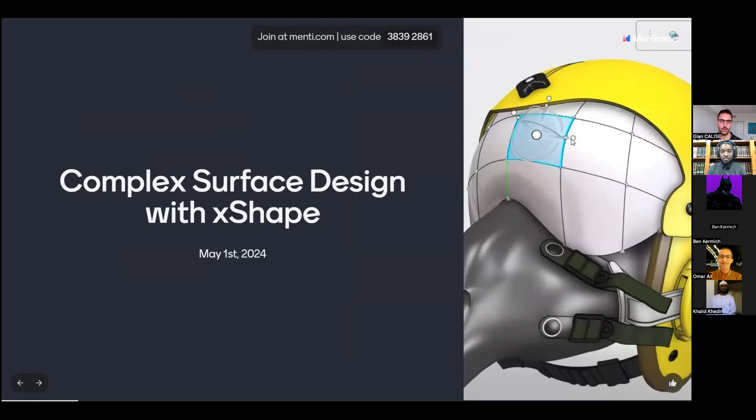So the first thing I wanted to talk about is what is xShape, and before that, how often does everyone on the call design things that include complex shapes or surfaces? Is it something you do daily, weekly, monthly, yearly, or something you rarely do, almost never? Okay, so it looks like we got a few. A lot at monthly. Wow, we got one daily surfacing user. Awesome. Great to see.

Any type of product that includes those complex shapes and surfaces would fit into this category, like a bike helmet, something in aerospace that has those crazy surfaces, or a consumer product, really anything in between. All right, so we got a couple of answers there. It looks like a good mix, but almost everyone has some familiarity with designing complex shapes and surfaces.

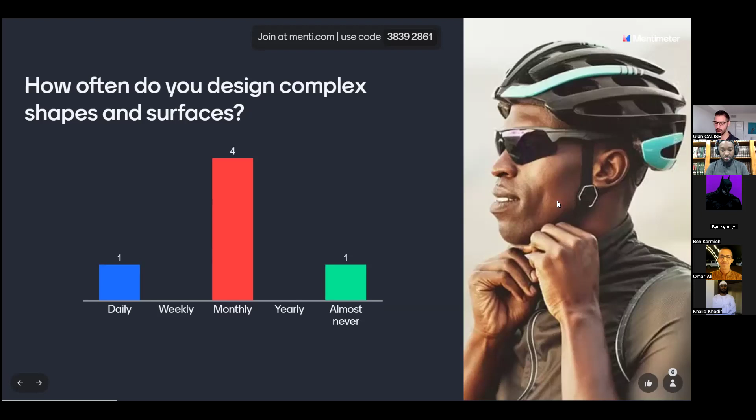So when it comes to xShape or sub-D modeling, have you heard of xShape or sub-D modeling? Do you have an idea of what it is, or not? If you have never heard of it, that's great, because we're going to start from absolute basics today. And if you haven't already joined, be sure to go to menti.com and type in this code, because we're going to play a little game in a moment.

All right, cool. It looks like about a third have heard of it before and some have not. Okay, so a lot haven't actually heard of it. That's great. So let's take a look at what actually is sub-D modeling.

And that's kind of the three things I want to touch on today with complex surface design with xShape. One is, what is sub-D modeling? And that is what we're going to start with. And then we'll talk about using xShape in SolidWorks, and then, kind of the beginning of an advanced topic, parameterizing sub-D. But first, what is sub-D modeling?

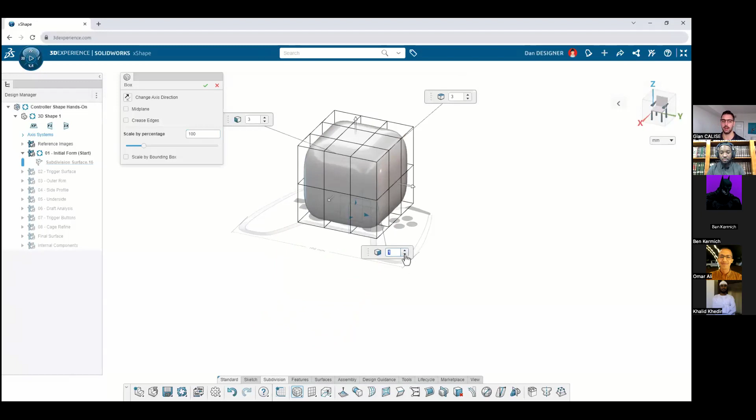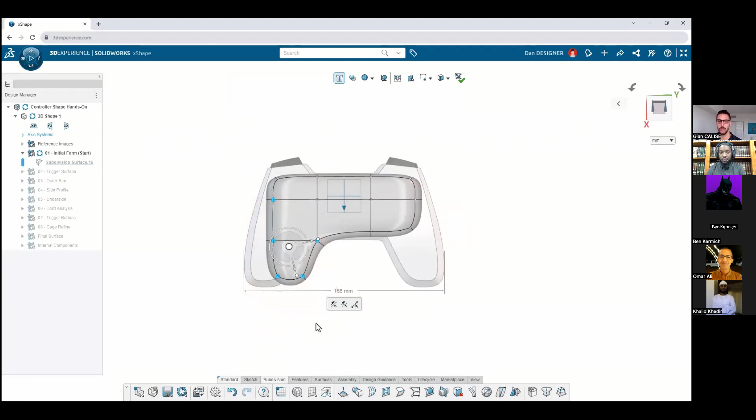Well, sub-D modeling is not the same as parametric where everything is feature based. You're kind of starting with like a digital hunk of clay that you can set parameters for, but then it's really just pushing and pulling to get the different shapes that you want. There's no feature tree, so you'll notice that we just have one subdivision surface here that we're working in. There's no new features being added, but we can just kind of sculpt this shape into the form or into the surface that we're looking for.

And there's a lot of really interesting options along the way that make this a really useful tool for mechanical engineers, industrial designers, and a lot of mechanical designers and product designers that have a need to create things that are complex in nature, at least in the exterior surfaces. So there's a whole host of different products that can take advantage of a tool like this.

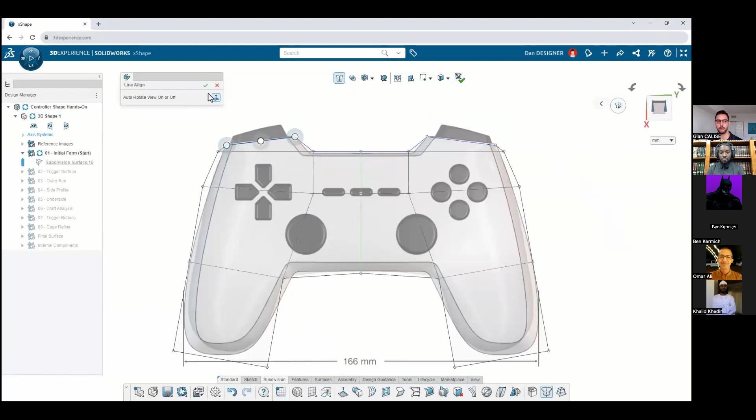But I actually want to take a step back and show the main types of products that we deal with as SolidWorks users. If we put them all in a spectrum, SolidWorks might find its way into every single one of the products that you see on screen right now. But we tend to think more in the mechanical design realm. That's where we focus. That's where our strong suit is. And of course, we have incredibly powerful surfacing tools.

But then once you get to certain areas like artistic design, this is when a lot of companies, a lot of industrial designers and product designers use mesh modeling tools, like ZBrush or Maya or Blender. Those would be mesh-based tools where you're creating a mesh, and it's a lot easier to be artistic because everything is not inherently constrained with parameters the way that mechanical design is. But industrial design is somewhere in the middle where there is an artistic portion of it, but then there also is some mechanical design required too. And that's really where xShape tends to shine.

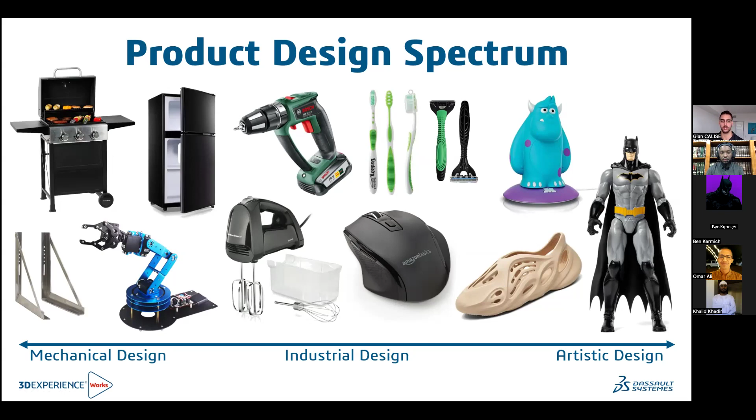So xShape is our actual sub-D modeling tool that is fully on the cloud, fully in a browser, but it works really well with SolidWorks, and we'll show that in a moment. But the difference is what comes out of this. So I mentioned how on the right side of the spectrum here, you would typically use a mesh modeler. On the left side, we need to end up with what are called NURBS surfaces. So there's two different types of formats. There's NURBS, which are non-uniform rational B-splines, and this is what SolidWorks surfacing creates.

So SolidWorks surfacing is creating these surfaces that are driven by math and geometric constraints and relations, but still give you that smooth result. And the native CAD systems, like Parasolid, we've got SolidWorks, NX, Solid Edge. CATIA uses CGM. There are different underlying technologies that produce those NURBS surfaces.

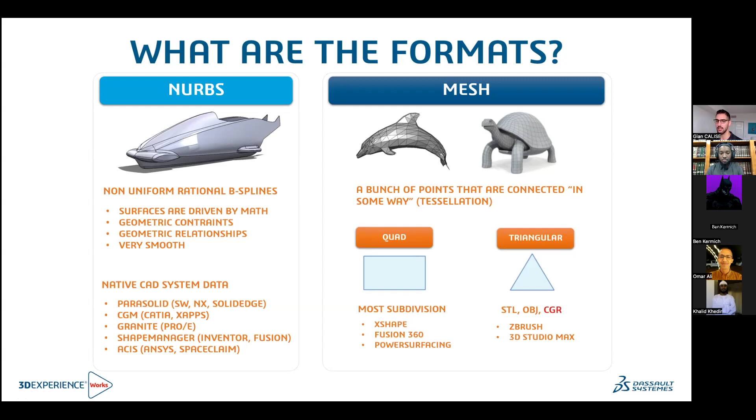Whereas mesh, like we see on the right here, there's a few different types of meshes, and a lot of different tools out there for making mesh models, like I mentioned before, for the more artistic side of design. And these are what are called tessellated. So they're not always inherently smooth surfaces. And if you've tried to use mesh data in SolidWorks, then you probably know that it doesn't always come through perfectly the way you want it to. And sometimes you need to do some post-processing steps to get it the way you want it to look.

So subdivision is kind of in the middle, where you're starting with a mesh. Like you see, we have this kind of cage or mesh of vertices and lines connecting them, but then we also have the surface in the middle. So we are actually using a control mesh. That's what we're using to create the shape. The resulting surface has no concept of the shape. You can make a circle or a cylinder in sub-D, but it doesn't actually know it's a circle or a cylinder. And as soon as you were to push or pull one vertex, then it's no longer a perfect cylinder anyway. But you get this extra flexibility.

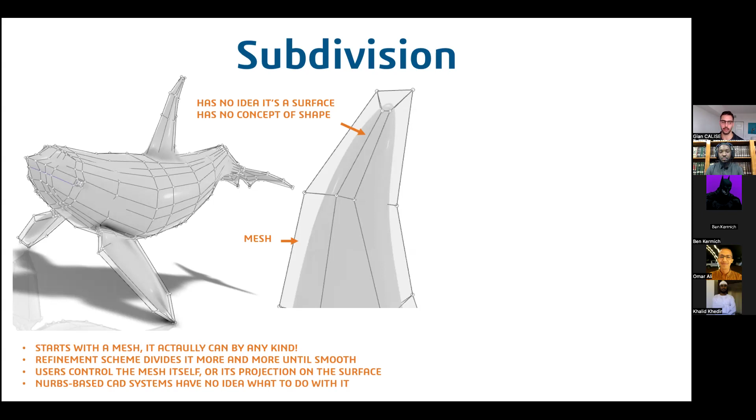So in order for what we make in a subdivision tool to be used in a normal parametric assembly, like if you wanted to make this orca in xShape and then bring it into SolidWorks, we still need a NURBS surface. And one of the really powerful things about xShape is it allows you to model freely in this subdivision environment, but then as soon as you're finished, it converts it to a NURBS surface automatically so that you can cut a hole through it. You can use other traditional surfacing tools. You can do whatever you need.

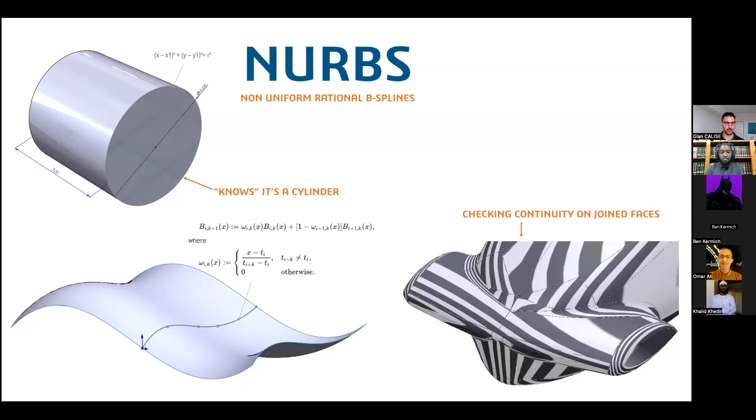So the NURBS, the non-uniform rational B-splines, that's where everything is driven by math. And we kind of get the best of both worlds with xShape because you can model things in sub D and take advantage of the speed and the freedom that it gives you, but still end up with usable surfaces in SolidWorks.

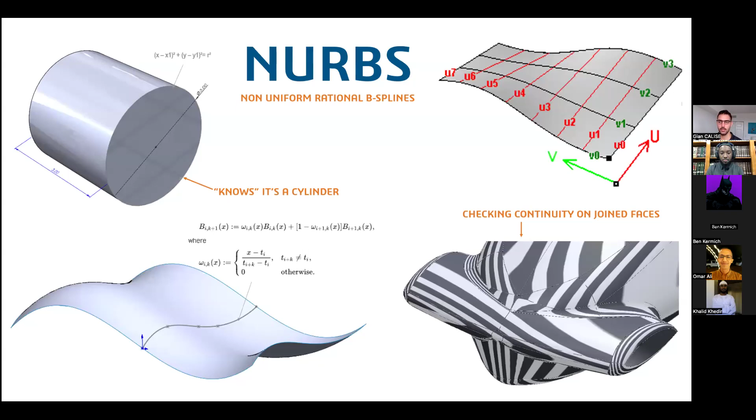And the key benefits are shape creation without any overhead. You don't have to create sketches. You don't have to have a plan in mind. You can start right in 3D. There's less of a hack and slash method to make changes because when you're making changes, you're just pushing and pulling either the vertices or the faces or the edges on the sub D surface. You're editing a single shape. You're not actually editing a whole list of features or series of features.

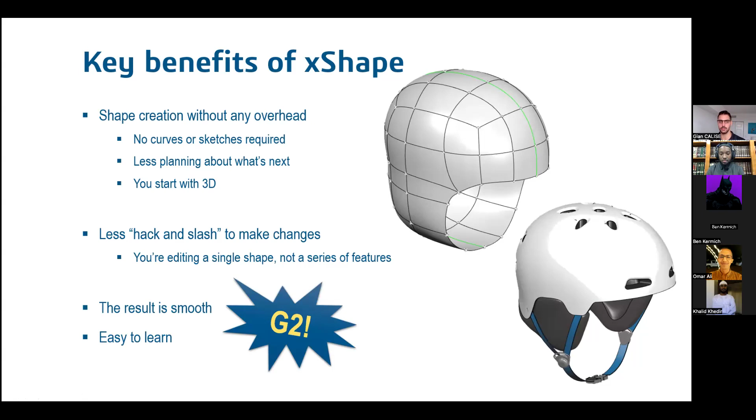The results are always smooth and it's G2 continuity. So the highest level that most industrial designers or artistic designers are looking for in their surface design. And it's just easy to learn. It's really not an incredibly difficult tool. There's not a ton of features because you don't really need them. You have a select set of features that can kind of allow you to make almost anything.

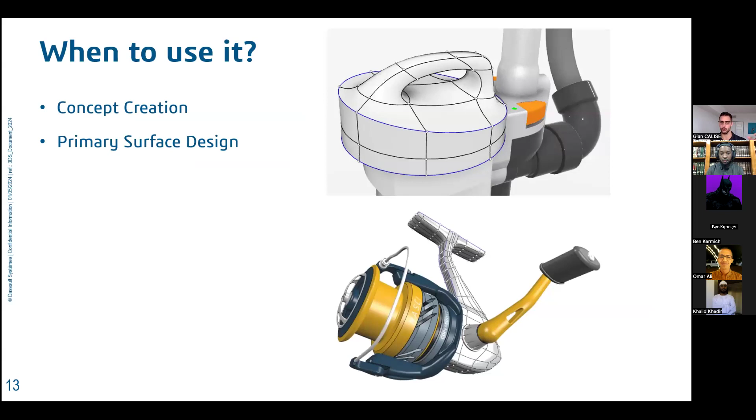And when to use it, the best time to use it is concept creation when you're doing that primary surface design before you do, you know, all the features downstream. And then, of course, whenever there are reduced constraints. So there are always going to be parts of your design that they have to constrain in some way. They have to be a certain dimension wide, or they have to interface with another component in this specific way that is constraining on the design. But when that's not the case, that's where xShape is very, very powerful.

Okay, I just saw in the chat that there's no sound. Are you guys still hearing me? Oh, yeah. We can hear you. Okay. Probably internet connection problem. Yep. Okay. Awesome. All right. Just wanted to make sure. Thank you.

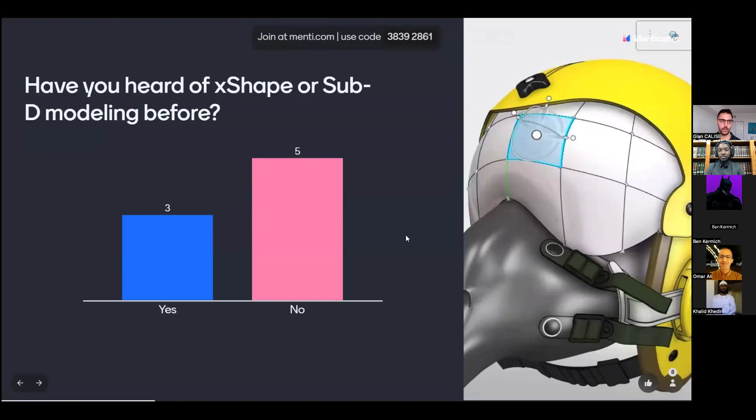We're gonna play a little game called Sub D or Surfacing. So the rules of the game is that I'm going to show you a model and I've homogenized all the images of the model. So it's not like a screenshot from within SolidWorks. I've rendered them all out in the same system. So you just see a product and you're going to choose, do you think that this was made with a sub D modeling tool or was it made with traditional surfacing? And I didn't make every single one of these, but I have made almost every single one. All right, let's get started.

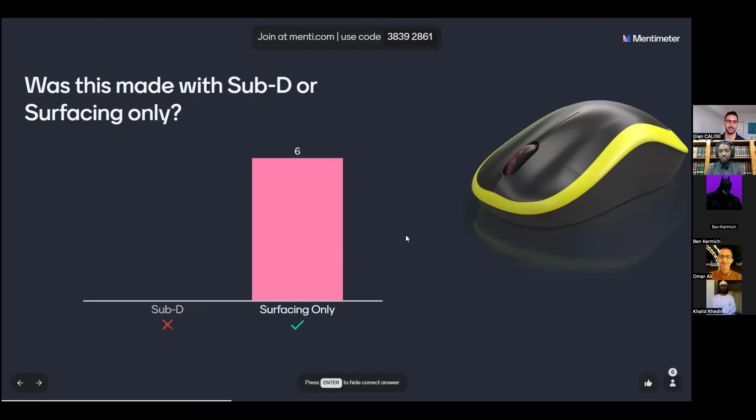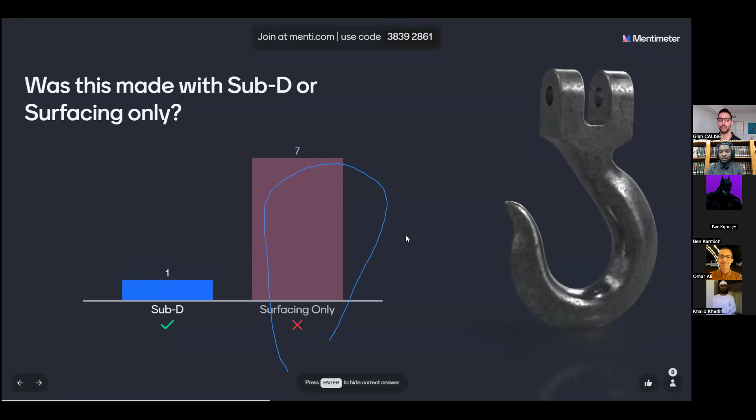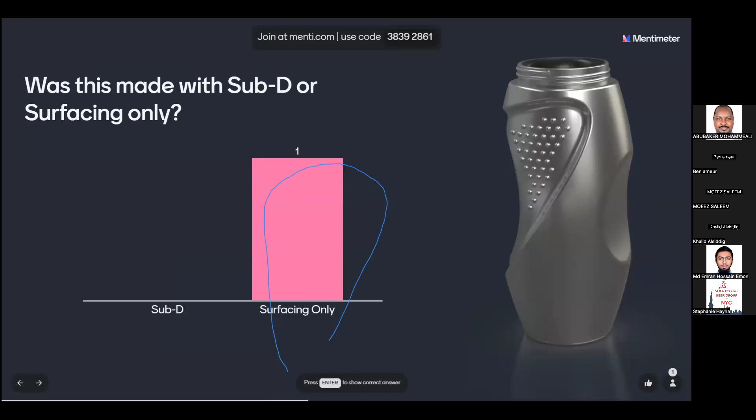Okay, awesome. Well, our single voter for sub D was actually the one who got it right. This one was made in sub D. So just to show you that not everything you see that looks very parametric in nature is actually only done with surfacing. There's a lot of ways that you can accomplish shapes like this with xShape or with the subdivision tool. All right, what's next? This water bottle. What do we think? Is this one sub D or is this surfacing?

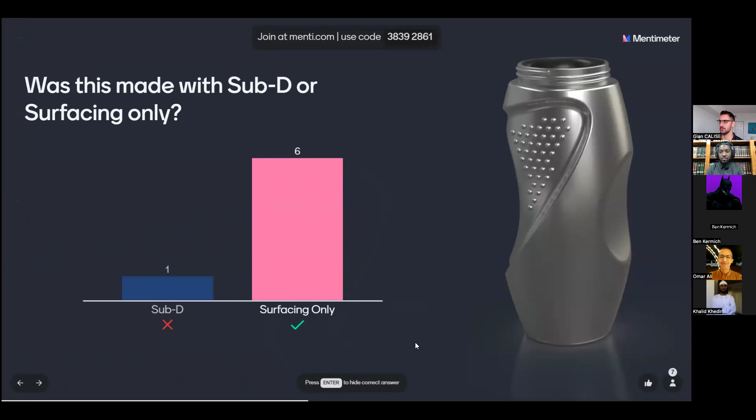Surfacing. All right, cool. Everybody thinks this is surfacing. Yep, you got that one right. This one was surfacing. This is actually from a SolidWorks surfacing tutorial on YouTube. If you haven't seen this one, it's a pretty nice one. All right. Let's go to the next one.

This kayak. Is this sub D or is this surfacing? Sub D instantly got 3 votes. Wow. Yeah, you sub D voters, you got it right this time. This one is definitely sub D. Although you could have, maybe not just as easily, but you 100% could model this using traditional surfacing tools. And that's probably how most kayaks are modeled. They're probably not modeled, for the final version, using sub D.

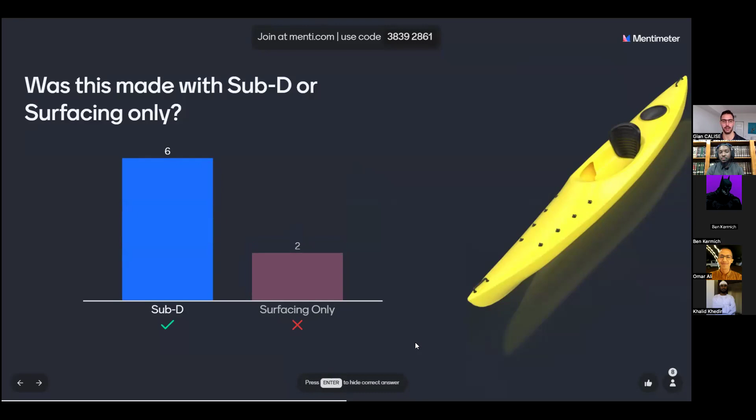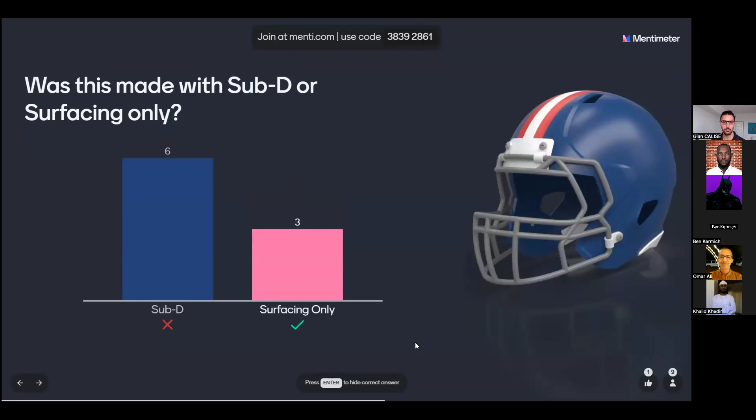But all right, this football helmet, sub D or surfacing. What do we think that this one is? Sub D. Wow, a lot for sub D on this one. Tough because this one is actually only surfacing. So this was surfacing only. But you definitely, once again, could model this in sub D. All right,

motorcycle helmet. What do we think this is? Sub D or surfacing? All right, instantly we got a bunch of votes for sub D, and you guys are all right on the money. This one is 100% sub D. Or at least I shouldn't say 100% sub D, because the base of this was made in sub D, and the base of pretty much everything you see here is made in sub D. But then we did use a couple surfacing features to clean it up and to get it looking the way it looks here.

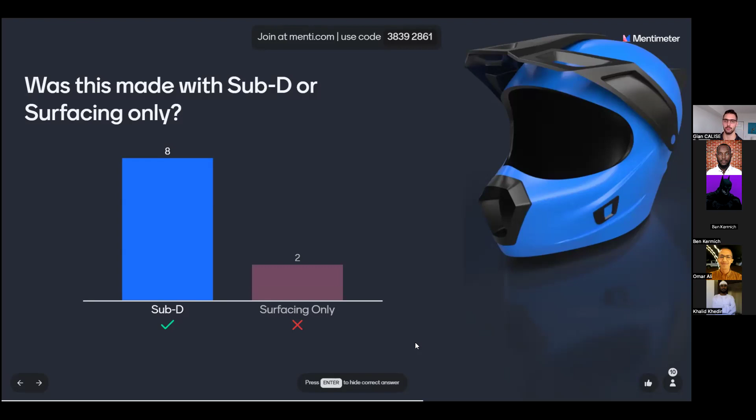And that's just to paint the picture that you're never going to only use one. Sub D is really just another tool to add to your arsenal. It's another tool to add to your toolbox of things that you can use to create quick concepts, create the base surface, and then add whatever features downstream, surfacing or not, to get it ready for manufacturing.

What about this one? This is another really artistic one. And immediately it seems like everyone assumes that this is sub D. But you might be surprised to know Jordan Tadich, if you know Jordan, he actually modeled this, sorry, not in sub D, with SolidWorks surfacing. And he actually told me this took him roughly about 40 to 50 hours or so to model this thing using traditional surfacing tools.

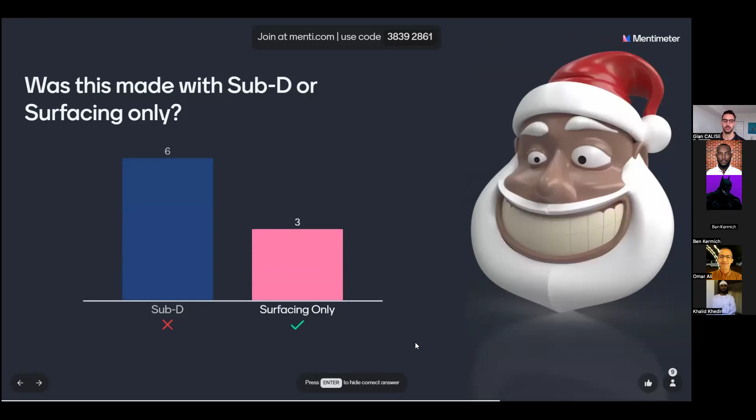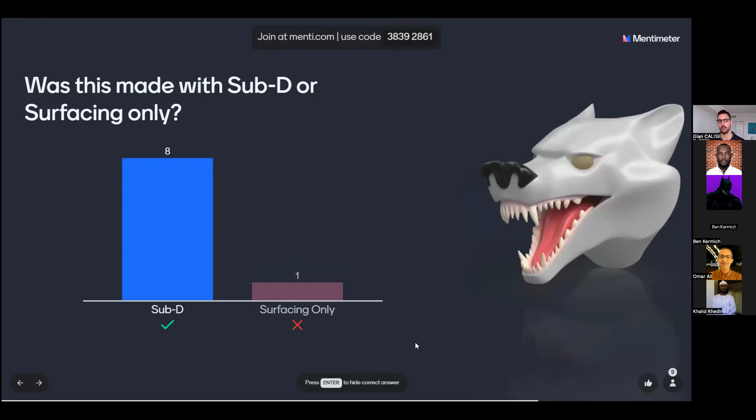My last question, though, for you all, this is still part of the game. I'm curious. You know that this wolf head was done in sub D, but how long do you think it took for me to model this in sub D? So you can use this slider to choose, is it 1 hour? Is it 50 hours? Somewhere in between. How long do you think that this actually took to model? And keep in mind, Jordan's little Santa head took about 40 to 50 hours to do using traditional surfacing tools.

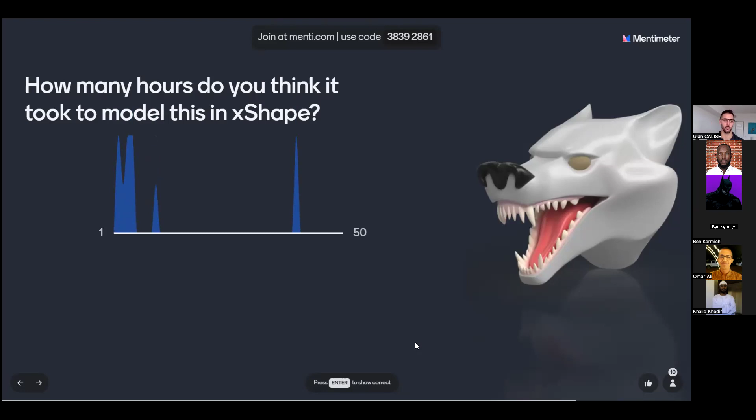All right, and it seems most of you think that I am like a sub D genius and just modeled this in 1 hour. It did take 3 hours. So it looks like a couple of you were right there or very close to it. And I have proof because this was all done in one modeling session that I recorded on my laptop. A lot of the time lately, I've been recording everything I do in sub D, because I love watching the time lapses after the fact to see how I actually figured out how to model this thing, because it quite literally is just like pushing and pulling a blob of clay.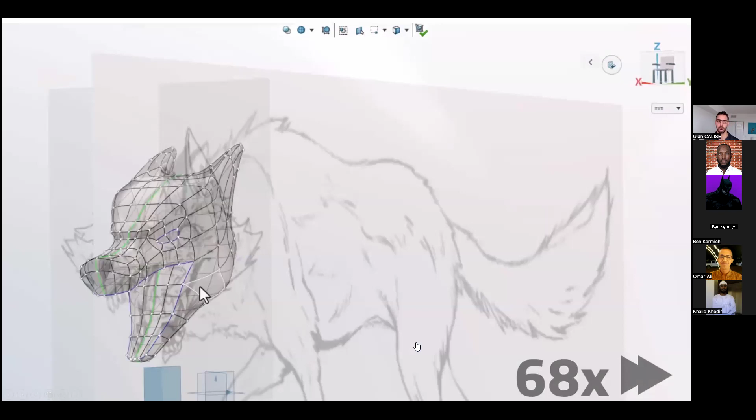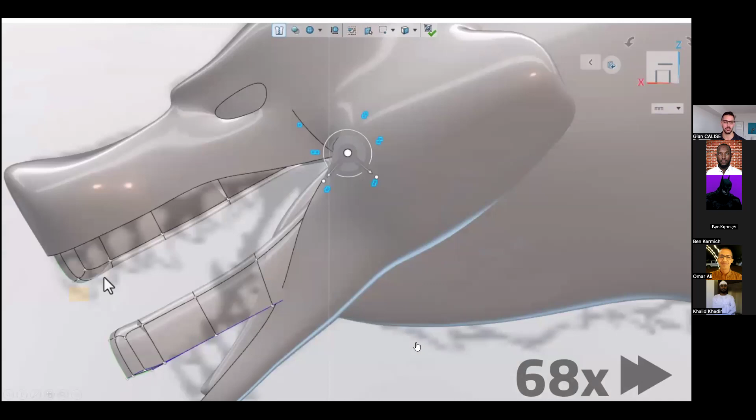Like you add material, you take material away, you want to add more or less detail, you subdivide or insert more loops. Making this tongue was really interesting. And then making the gums here. This is a really weird way to make the gums, but they're all just separate sub D bodies. And then making each individual tooth, they were each their own sub D body here.

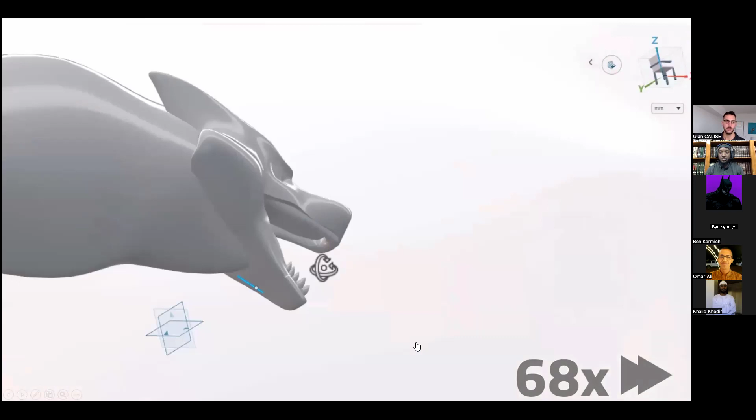Luckily, we have like a copy and paste sub D. So I could just copy the tooth and push it over, change it a little bit, make it a little bit bigger or smaller. Yeah, this nose was pretty interesting. And this is super fast. This is 68 times the normal speed. But yeah, this is a lot of fun, actually.

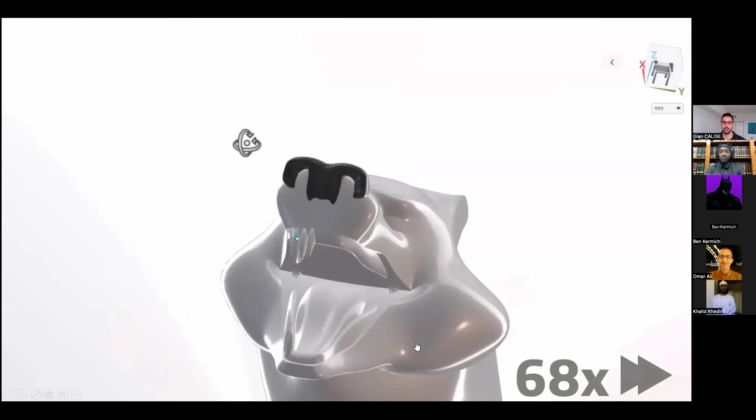I'm sure that you guys get into this state of flow when you model in SolidWorks, when basically you're having more fun than you are actually putting work into modeling. And so it doesn't even feel like you're really working. That's kind of how it is for me with xShape. I love this kind of digital sculpting that we can do here.

So I think that just wraps up the wolf head itself. We did add a lot more detail after the fact, but you can see how quickly we were able to get to a shape that was usable. And just for your reference, I don't just model wolf heads for no reason. This was for a Magic Wheelchair project; one of our kiddos over in the Detroit area was a big fan of wolves. So I was the modeler for one of the teams working on one of these Magic Wheelchair projects.

If you haven't heard of Magic Wheelchair, it's this amazing foundation where they find kiddos with wheelchairs that have a particular interest in having a really cool wheelchair that they get to choose what it is. So I got to play a small role in this really cool one where this kid loved wolves. So we got the heads 3D printed and we had a lot of help getting this whole thing together, but this was a lot of fun.

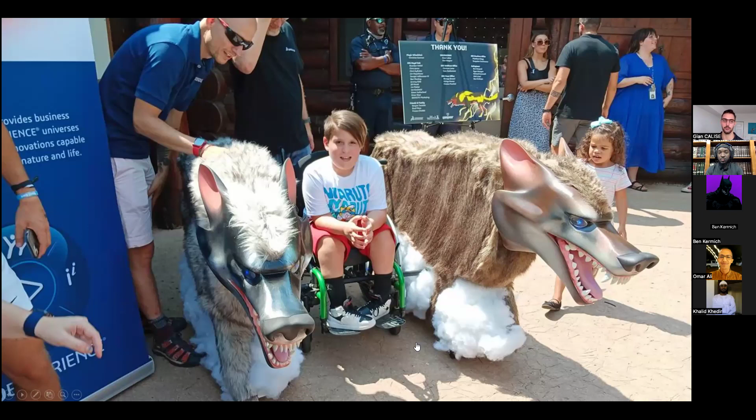All right, so that was what is sub D modeling at a high level. I want to show what's most relevant to you all, which is using xShape and SolidWorks together. So what does that actually look like? How would you, as a SolidWorks user, be able to take advantage of a tool like this? Well, there's two primary methods. There's using it in assemblies, and then there's when you actually have an xShape surface that you want to add features to in SolidWorks, when you want to use xShape geometry in SolidWorks parts.

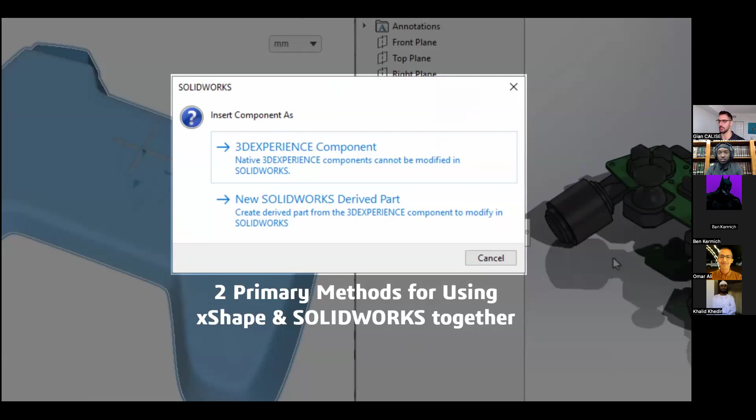So let's say I have an xShape component, I want to drag and drop it into SolidWorks. I instantly am prompted with a choice. Do you want to make this a 3D Experience component that'll just be added, and it would turn your SolidWorks assembly into a multi-CAD assembly where you have SolidWorks parts and 3D Experience components. The other method is create a new SolidWorks derived part, which automates the process of creating a new SolidWorks part and then doing an insert part feature of the 3D Experience component so you can keep adding features downstream. So we'll take a look at both of those methods.

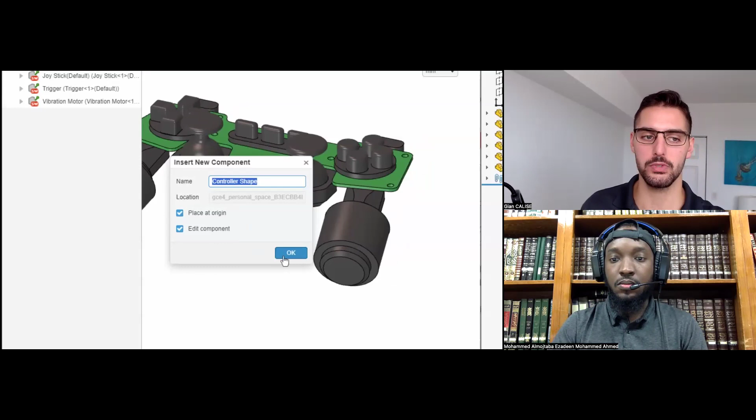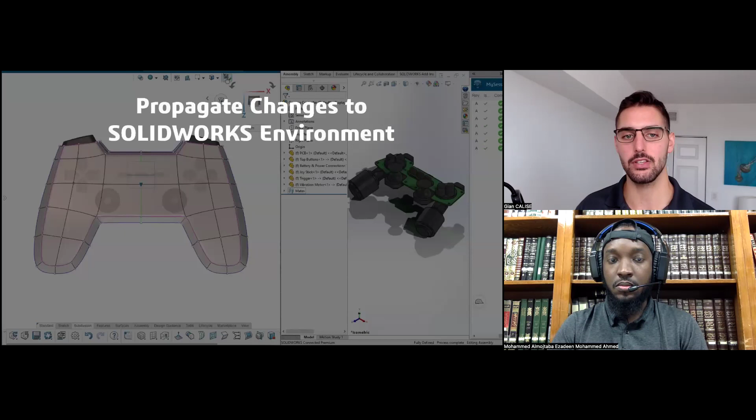I love modeling right in context of the assembly. So one of the things that you can do in the X apps and in xShape, we can insert components right into the SolidWorks assembly so that we can actually sculpt in the context of our assembly itself. So just like you saw before, we can sculpt this gaming controller into shape. I'm going to fast forward through most of the steps here. We can apply symmetry, we can crease, and we can save and then propagate these changes back to the SolidWorks environment. So we'll save,

and then we're just going to simply reload the assembly from the server. And this works because all of our SolidWorks assembly and parts here are stored in the 3D Experience platform. If you're not familiar with this task pane on the right, this is the task pane you get when you save everything to the 3D Experience platform. And then this right click and reload from server allows you to look back up to the cloud and pull down the latest version. And then we get loaded up with the new assembly that includes this controller shape 3D Experience component.

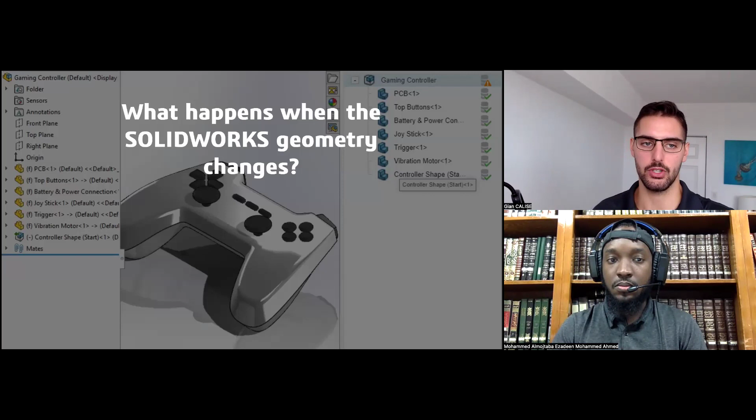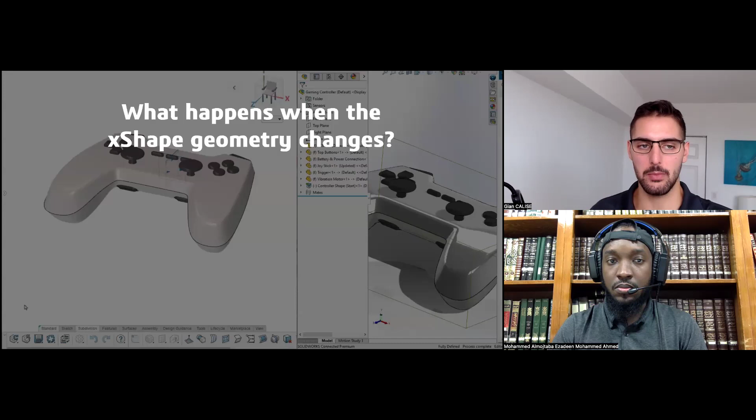But what happens when the SolidWorks geometry changes? So for the example of this gaming controller, maybe our joysticks end up being a little bit bigger at the base there. Once again, all we had to do was reload in xShape, and we can see those changes propagate immediately. But what happens when the xShape geometry changes? Well, it's a very similar method. In this case, we're just going to pull this face forward a little bit so we don't have to compromise our shape. And then once again, in SolidWorks, we're just going to save and reload from server.

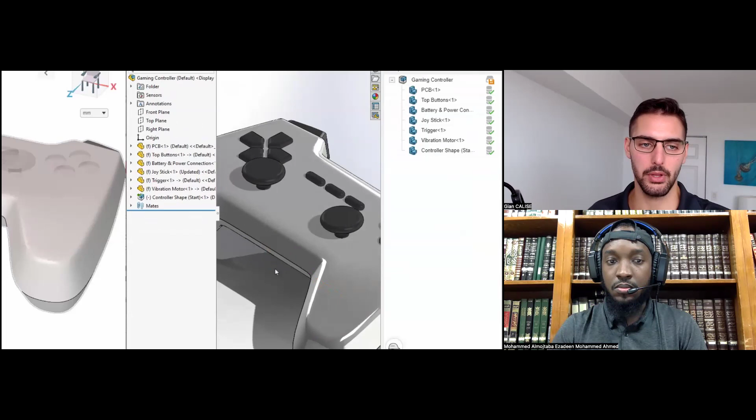And now we can see we no longer have that bleed through. And if you tried to do this with SolidWorks surfacing, it might not have been the most painful change you could have had to make, but this one is definitely going to be faster using the sub-D method when you're still concepting, versus if everything was defined with splines, sketches and surfacing features. It's just easier to make changes.

So this is where I'm going to switch over to the second method. So far you saw the multi-CAD approach. You can have the xShape component, which is a 3D experience component, live inside of a SolidWorks assembly. You can mate to it. You can add whatever features in xShape and XDesign to prepare that for manufacturing. Like you can shell it, you can cut the holes through it in XDesign and xShape.

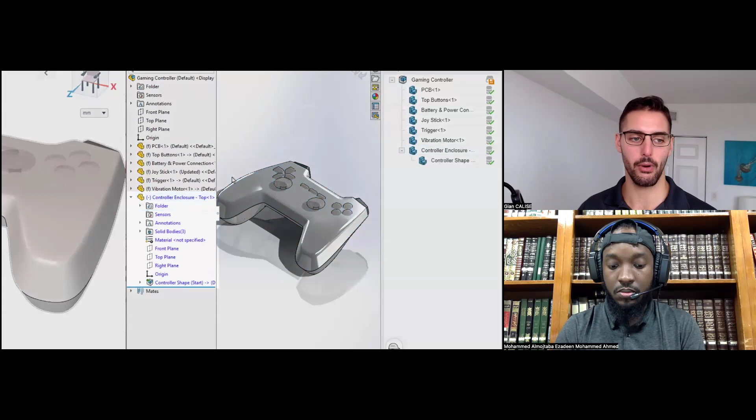Or if you would rather add those features in SolidWorks, what you can do is create a derived part from the xShape component. And all this does is automate the process of creating the part and then inserting the 3D experience component inside, maintaining that reference to the xShape part. So it's very similar to an insert part. You know how you can insert a part within a part.

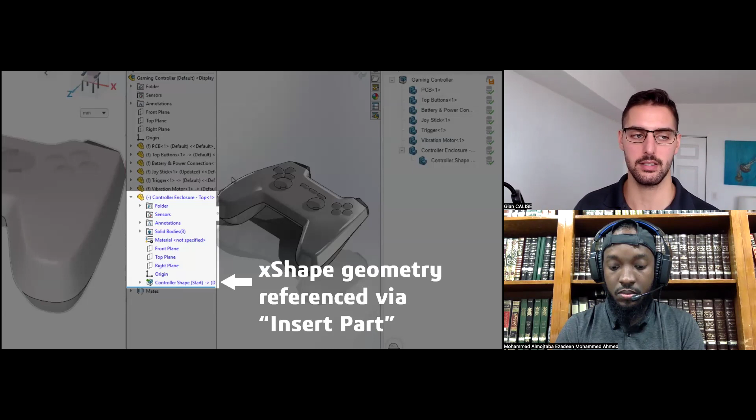That's very common for industrial designers: if you have a base part, like an overarching shape for the product, and you want to split it out into sections, this is a very common way to do it. And in this case, our insert part is just a 3D experience component. So in SolidWorks, we can add features like shell, or the indent feature. I love the indent feature. So powerful, especially when modeling in the context of an assembly. We can add those kinds of features.

And then what happens when the xShape geometry changes? How do we actually propagate those changes back down? Well, we can still just save and reload from server. The process is the exact same, whether you're using it as a multi-CAD assembly or in this derived part method. So that was a lot going on right there. If you have questions, feel free to throw them in the chat or just unmute and ask. But this is the basics of how you would use SolidWorks with xShape, using those two tools together.

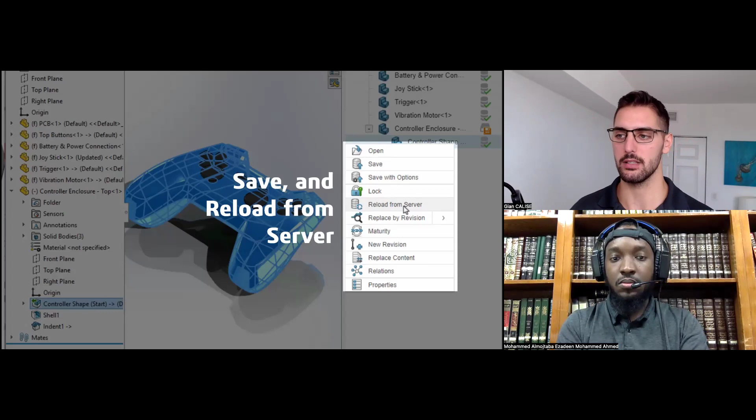And remember, xShape is fully in the browser, in the web interface. I usually will have xShape on one screen and SolidWorks on the other when I need to design with both tools. But that's the extent of using the xShape geometry in SolidWorks assemblies, as well as using that xShape geometry within an actual SolidWorks part.

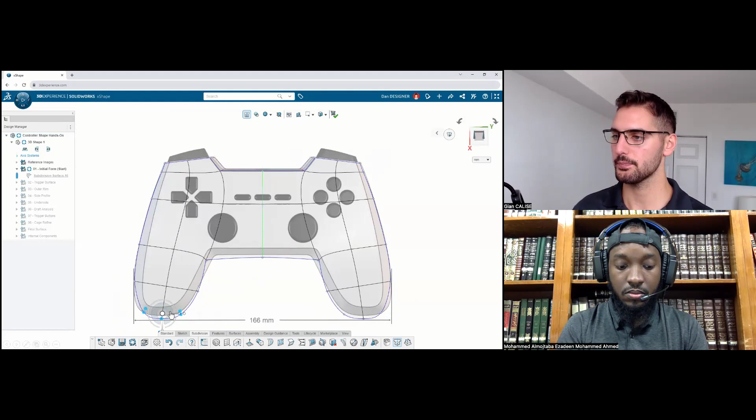So just jumping back to where we just were. All right, so that just about covers this. But the reason you would use the SolidWorks derived part method is because you want to use SolidWorks features. So if you can get what you need done using xShape and xDesign for those components, great. If you need SolidWorks for some of the advanced features we have, like whenever I need to do anything injection molding related, I don't know if I could live without the lip and groove feature, the mounting bosses. We have some really powerful ribbing in SolidWorks and a bunch of other tools that are

great for injection molding. That's when I would say, okay, take your xShape surface as far as you possibly can until you're happy with it. And then let's bring it into a SolidWorks part and add whatever features we need downstream. And that is the basics of using xShape and SolidWorks together.

So let's jump into, unless there are any other questions, feel free to throw them in the chat or unmute and ask. But the last thing I wanted to cover today was... Yes, great question. So yes, sub D is like working with clay. It's like working with a hunk of digital clay.

There are inherently fewer constraints, fewer parameters, but the last section I wanted to show you today is called parameterizing sub D. And I wanted to share that because it's one of the first things I always get asked by SolidWorks users: okay, if I make this surface in xShape, how do I make sure that it is the correct dimension? How do I make sure it's accurate and lines up with what I need it to in the assembly?

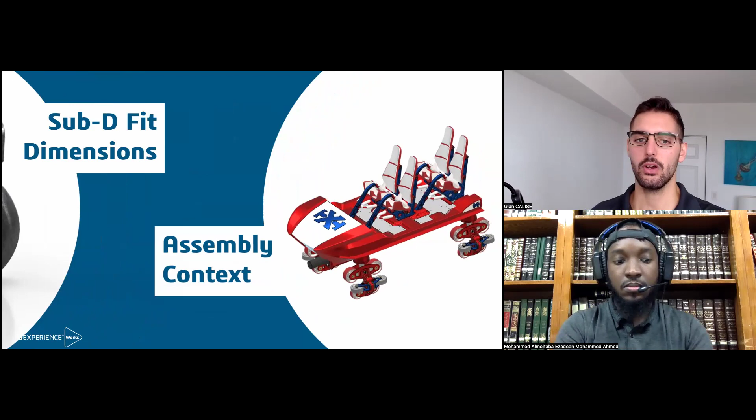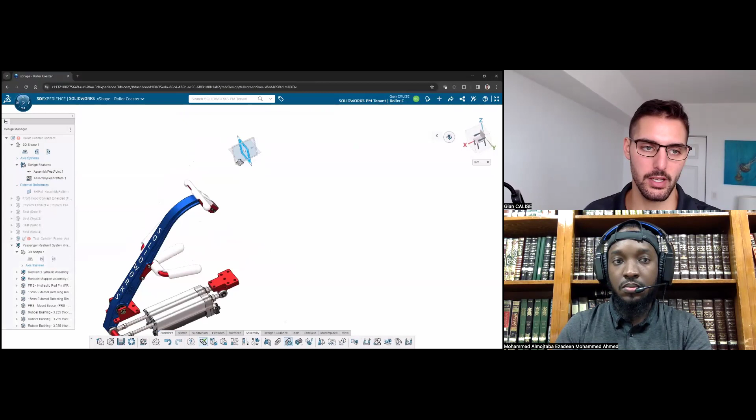So I have two models to look at here. We've got the hook, which we now know is made using xShape. And then we also have this cool roller coaster part where I think it's the lap bar that we're going to take a look at. But let's start with the lap bar, or the restraint system, I guess, for this roller coaster. So this is just one context of an assembly where we had to fit parameters of other components. In this one, I'm going to fast forward through most of this, except for the parts that are really specific to this one topic.

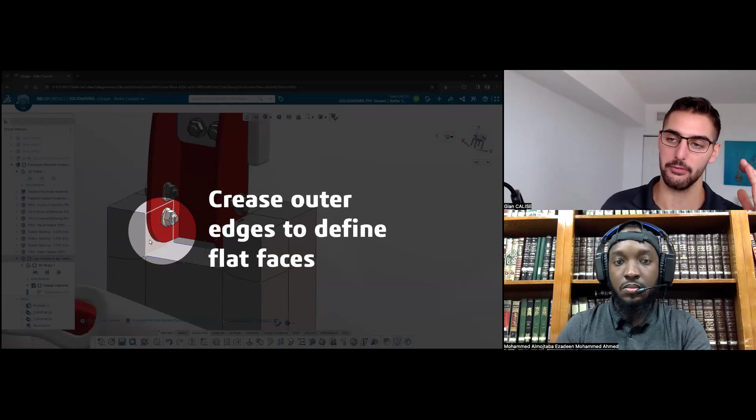So we start with this blob of clay. We're pushing and pulling, adding symmetry, inserting loops. We can extrude faces and add creases. And one of the things that we can do is crease outer edges to define a flat face. So you'll notice that in sub D, we have all these different faces. And as long as there are creases all around one of them, you can actually make it fully flat. And xShape, xDesign, SolidWorks, they'll all recognize it as a flat planar face. And then we can do things like align it to other flat faces.

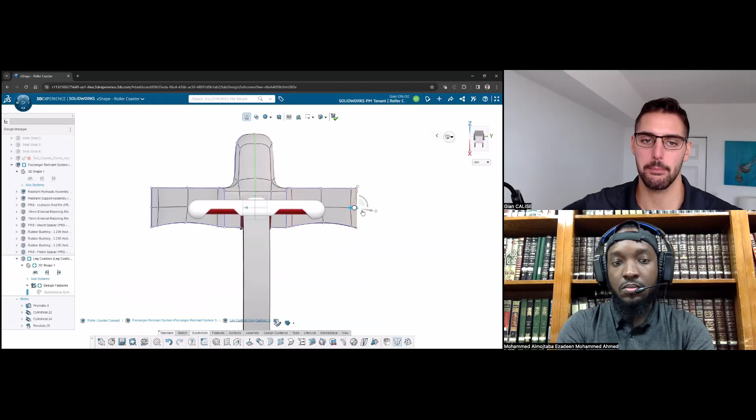So we can take that flat face we just defined in our xShape surface, and we can align it to geometry so that we can make sure that this actually fits where it needs to. So we can keep using those alignment tools to get this to the right dimensions that we need it to be. Another thing that we can do is align edges to be collinear. So we can align all of these sub D entities to each other or to other model items. And then once again, we can just sculpt whatever we need to sculpt. We can make whatever shape we're looking for, mostly just by pushing and pulling with this little robot manipulator.

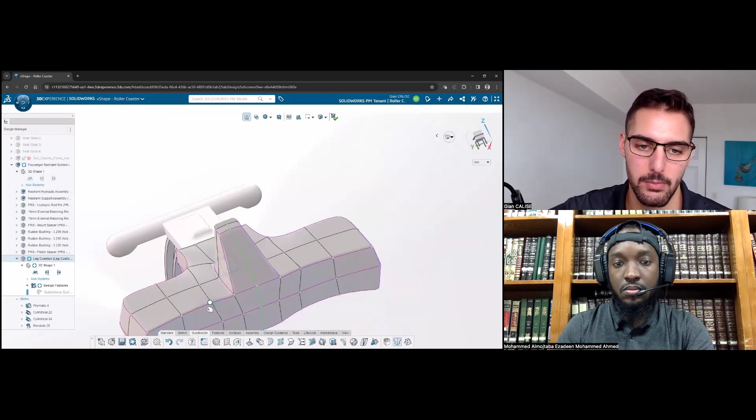This little triad that we call the robot. You'll notice I have creases going all over this model, those pink edges that kind of break up the continuity of our surface, which is just a real time save. It wouldn't be as useful of a tool if you could only create super swoopy shapes. Sometimes you need hard edges in there.

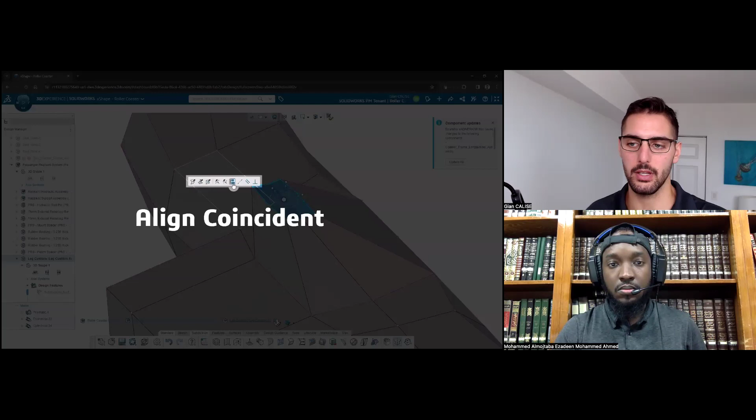Flattening faces. So we got a bunch of facets that are all kind of doing their own thing here, but we want to make sure that they're actually flat. So we can grab all four of those and align them coincident. Aligning them coincident actually makes them flat relative to each other. And then we can just continue modeling here.

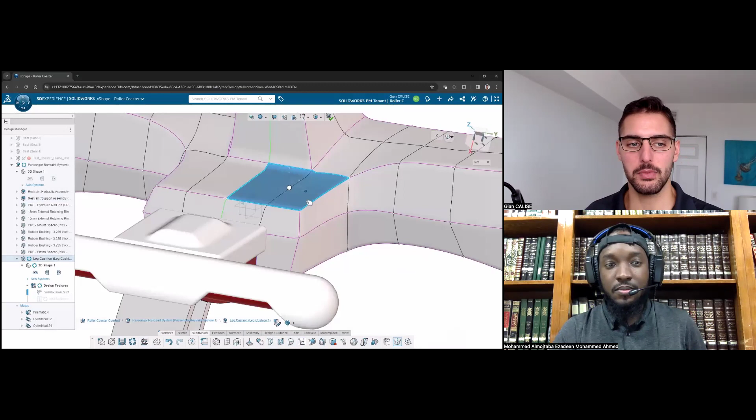I hope that this isn't too fast for you guys. I know I kind of keep it fast because I don't want to show things twice, but I also love the time-lapse approach to showing xShape because I could model something live for you right now, and we could get maybe 10% as far as we see right here, but we won't be able to see the entire thing.

So another thing that we can do that becomes so powerful is being able to translate along a direction that is in the model itself. So we can set our robot to go along that edge in the model and then make translations or manipulations to the model that are in line with that direction.

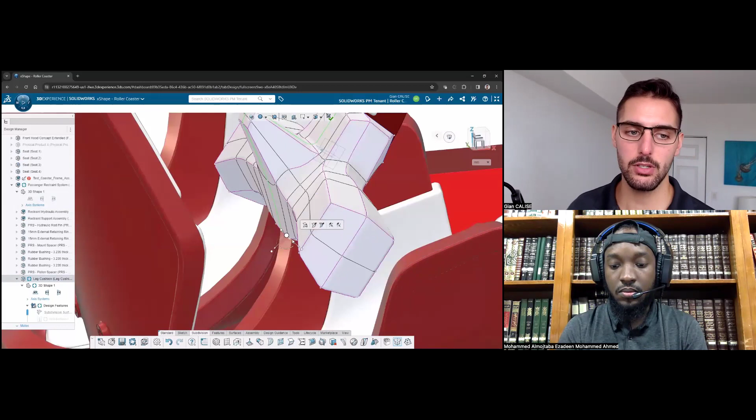You see, I've done a ton of working and reworking. It's very conducive to the creative process, where you're figuring out what shape you might want to use. And it's gotten to the point where I barely sketch anymore. I don't really do much 2D sketching when I want to make something. You can just jump right into 3D and figure out what the shape is that you're looking for.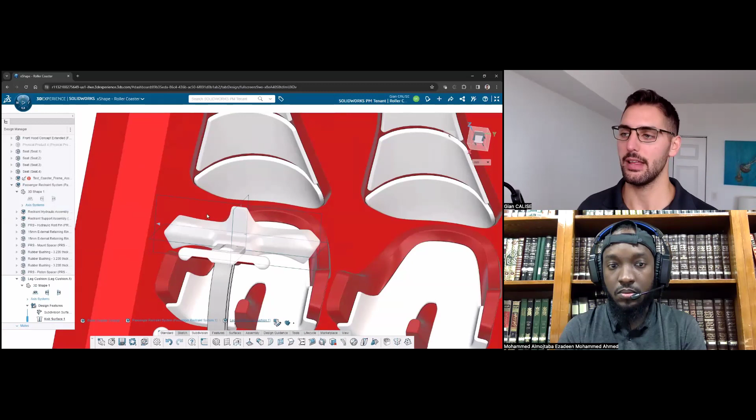And you might have seen that I was jumping back and forth within that cage view where you see the mesh. That's another really useful tool in there. But that's how we can take advantage of designing in the context of an assembly where there's a bunch of constraints. We needed to make sure that the lap band had certain faces that would align to the edges of our restraint system, that would align to those outside walls.

We also needed to make sure that certain edges or certain movements that we made were only along a certain direction, and we can set that direction based on the other parameters in our model. And then we also saw a bunch of alignment tools that you can use to flatten faces and make them work for what you're designing.

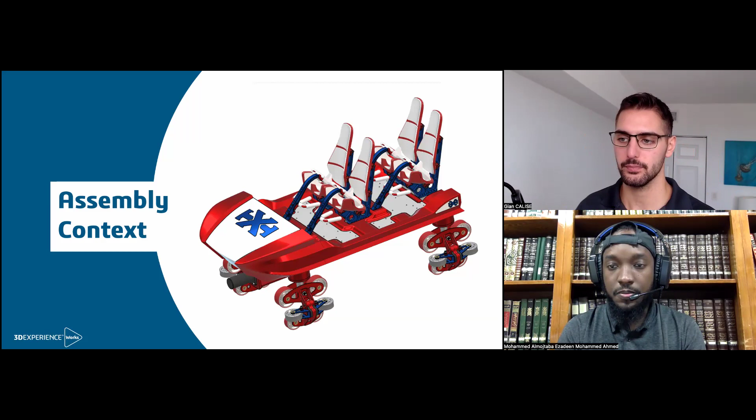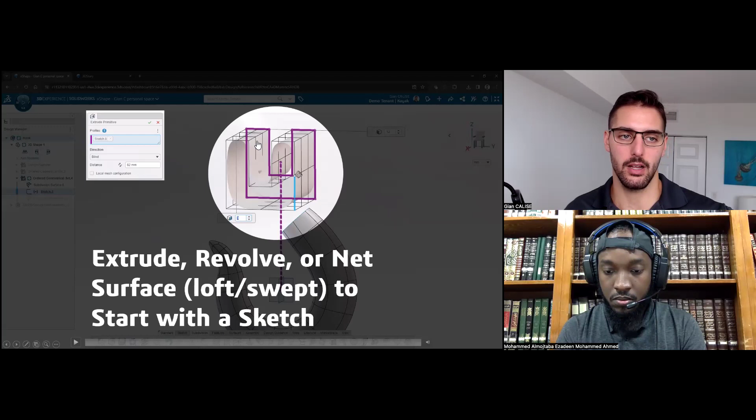So one of the tools that we can use is the extrude, revolve, or net surface. You can use a sketch to actually define the SubD surface itself. But keep in mind that it's the cage that we're working on. The cage itself is what we see going around this grid of faces and edges, but the surface within is what we actually end up with.

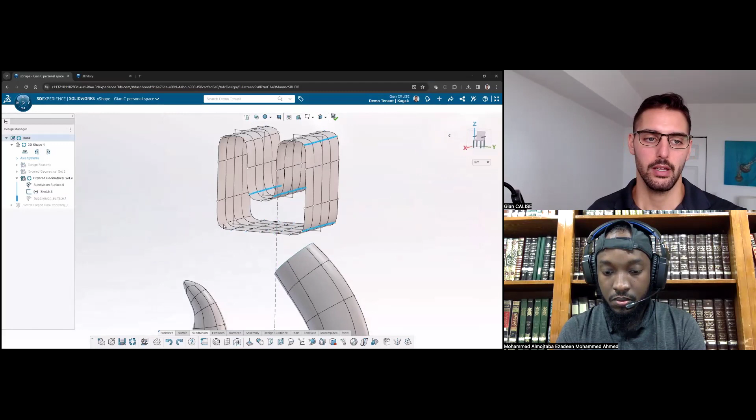And we can revolve, we can extrude, or we can loft and sweep to get our starting surface. And we can edit the number of edges going along this thing till we get the right number of vertices or faces that we're looking for. And then the first thing I do is crease so that we can end up with flat faces everywhere. And then we can make precise movements.

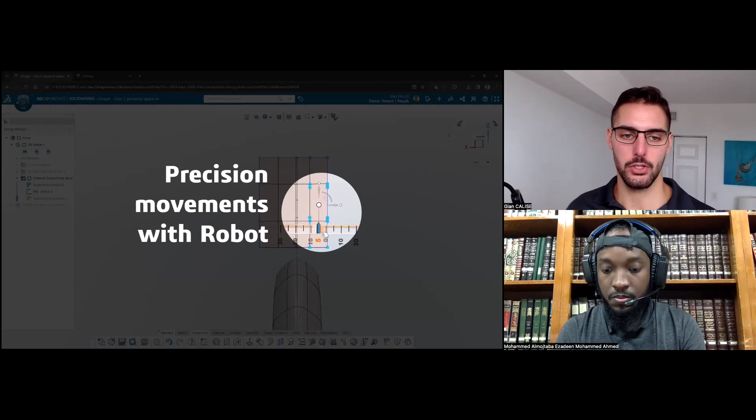So you might not have realized this, but this robot manipulator, we can move it by exactly 5 millimeters, or you can type in an exact value. Now, the thing to be aware of is, unless it's a flat face, it might not matter. But if you need to have two flat faces that are parallel to each other that are, say, 20 millimeters apart, you can still accomplish that with the sub D modeling in xShape. So you can still get there, and there's still plenty of other places too that we can do the same thing. But let's actually delete these faces.

So we want to connect this one sub D to the other, right? Because we want to merge these two together. So I just deleted those two faces, and now I'm going to extrude the edges of the surface and then just kind of line it up loosely where I need it to be.

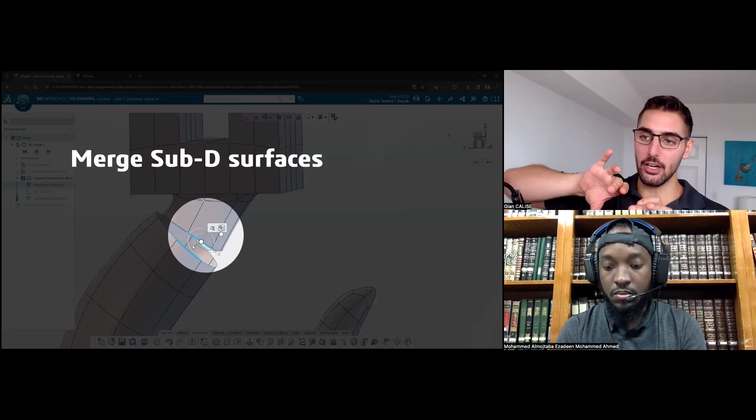And then one of the newest features that actually just came out a couple months ago is called the Merge Sub D Surfaces tool. And this is an extremely powerful tool where you have two separate sub D surfaces and they both have an open area. And we're just going to connect those open areas together and end up with one final subdivision surface. And now we have one subdivision surface that we could actually make sure was exactly 60 millimeters in width. So we can generate exact dimensions between flat faces.

Now, the tough part is right now, there's no easy way to ensure that dimensions of circular, cylindrical edges or faces meet an exact radius. And it's very difficult to get the curvature, like the way that you can define a spline, how you can say, all right, if I have a bunch of different spline points, I can make one point dimension a certain value away from another one. And although you can kind of get that to work here, it's not the same because remember, there's the cage. The cage points are what we're actually defining the distance between.

And when it's flat faces, then the cage is the same as the surface. When they're not flat faces, the surface is being interpolated from the cage, from that mesh of points and vertices, faces, and edges. And that's when the surface isn't necessarily on the vertex. It might be slightly inside or outside of it, depending on how the math works out.

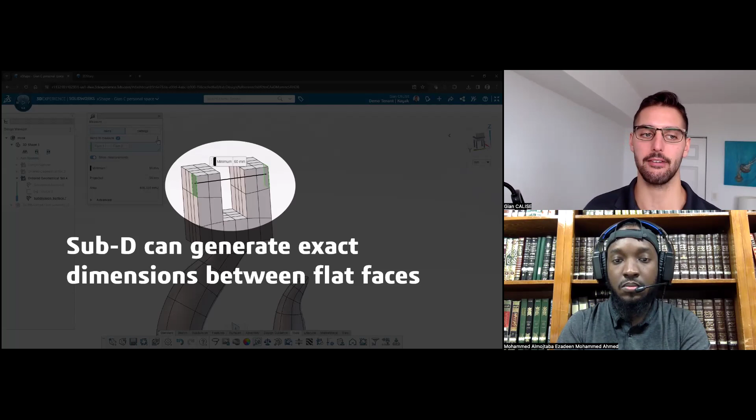But the thing we do know for sure is that using flat faces with sub D is foolproof and does work. You can get the dimensions that you're looking for, not in the traditional way like adding a dimension in a sketch, but you can still accomplish the high level of precision that you might need for flat faces as they relate to the rest of the surface.

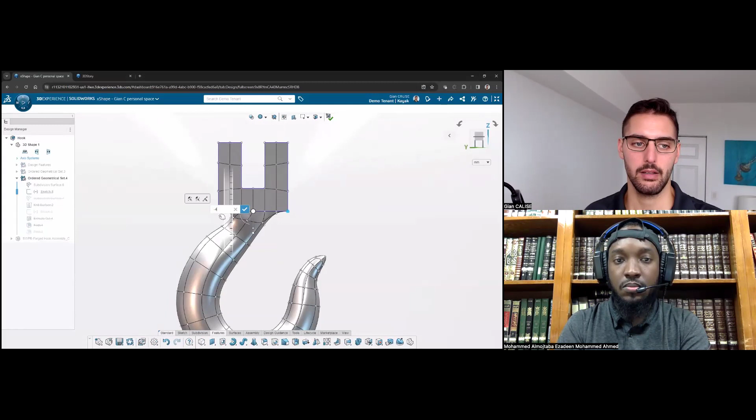And then, of course, we can still cut things. We can still cut through this. We can add fillets. We can just add whatever other manufacturing details we might need. And then maybe we change our mind and we don't want this to be flat across the bottom. We can push that up to the top and actually get that to be up by another 4 millimeters or so. We can push those faces up, and then the rest of our parametric features downstream will all update accordingly.

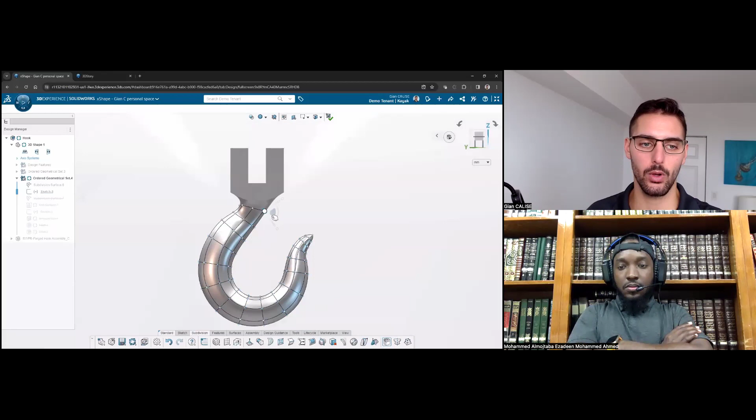But let's say I want to turn on what's called the working zone so that I don't edit anything else. So I'm going to leave the top alone while I mess with the bottom, while I mess with the hook itself, and now the rest of my features are still updated the way that we would expect. And yeah, that's the basics of how you can use the working zone to make sure that you don't edit anything unnecessarily in the subdivision surface.

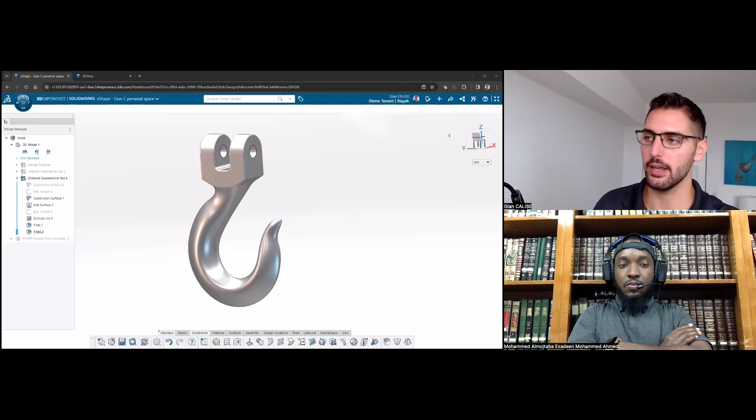And yeah, we added a cut, we added a couple fillets, and you could design this part fully in xDesign. Again, if you wanted to add those features in SolidWorks, you could bring this into a SolidWorks part and add them there just as well. So that was just about it for making your sub D fit certain dimensions.

All right. So we saw two methods. We had certain dimensions we needed to apply to our hook. And then in the assembly, we might not have necessarily cared about what the dimensions were, but we needed to work our surface around the parameters of our assembly. We needed to make sure that that lap bar could actually fit on the restraint system and be possible to actually attach that thing. So those were two great examples of parameterizing sub D geometry.

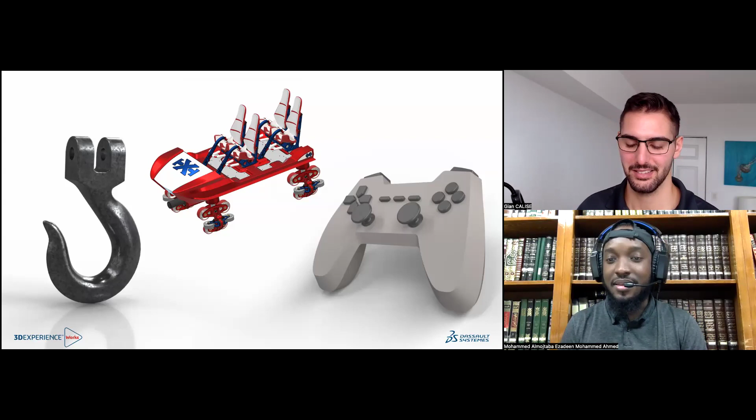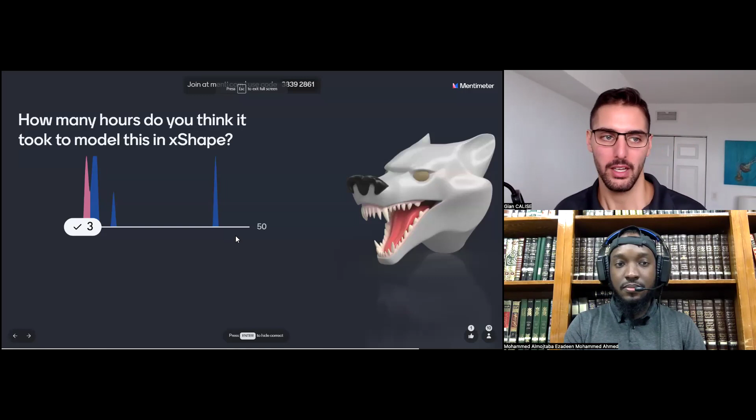All right. Well, I guess we're not seeing too many questions right now, but I'll leave you with this: sub-D modeling is speed and freedom. As an industrial designer, as a mechanical designer, as a mechanical engineer, if you're using SolidWorks surfacing, or if you have a need to create complex shapes and surfaces, what sub-D modeling offers is speed and freedom. Design freedom and just being able to generate and alter your design concepts so much faster.